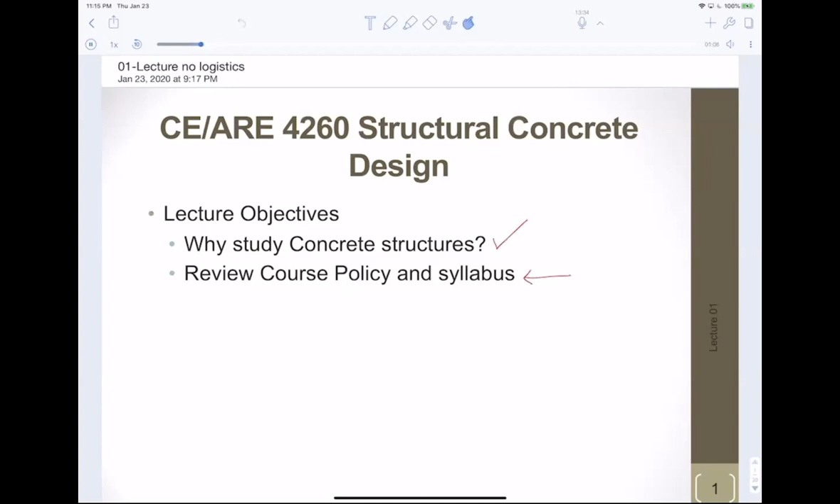On the first day of class, what I typically go over is introduce the subject of structural concrete, specifically reinforced concrete, and go over the syllabus. We'll do the syllabus later in a separate video. So right now, let's just talk about why you would want to study concrete structures, even if you're not going to be a structural engineer or majoring in structural engineering.

Concrete matters no matter what your specialty within civil engineering is. If you're interested in water resources, you have water control structures like dams and spillways. If you're interested in transportation, there are bridges or monorails like this one. If you're into geotechnical engineering, here we see an erosion control structure, often made out of concrete. And if you're into environmental engineering, there's the environmental aspect of concrete construction, since housing structures use foundations made out of concrete.

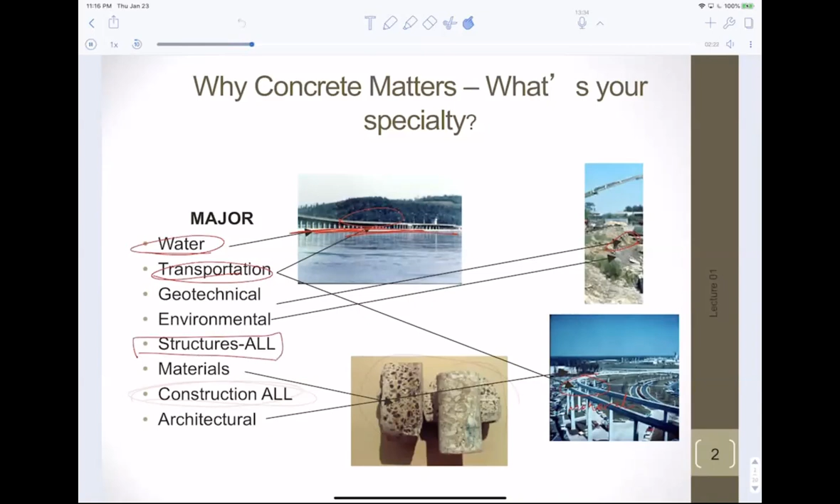And of course, if you're in structural engineering, concrete is involved in almost every building—even steel buildings have concrete foundations. If you're specializing in materials engineering, or if you took the 3210 class last semester or the one before, concrete is a widely used material in civil engineering. If you're in our new construction management program, concrete is a very, very important material in all construction projects.

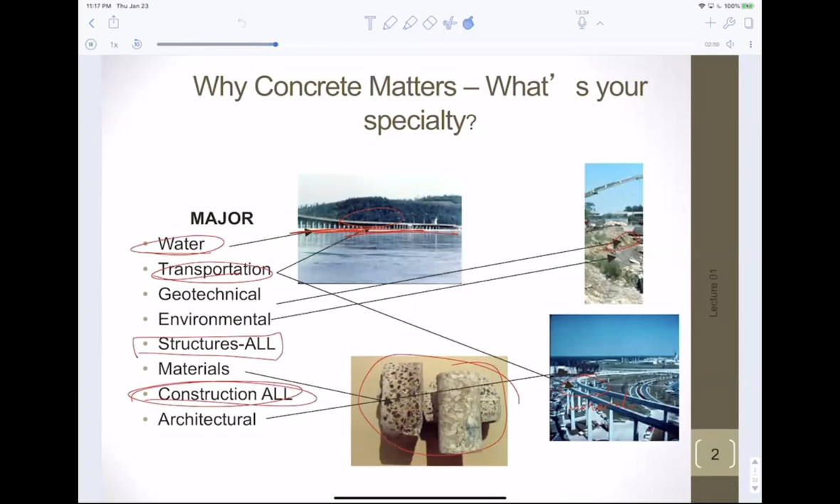And if you are in architectural engineering, of course there's a structural aspect of it, but in the design part, there are many unique structures, as we'll see later, that are made out of concrete. So these next few slides are for projects around the world made out of concrete.

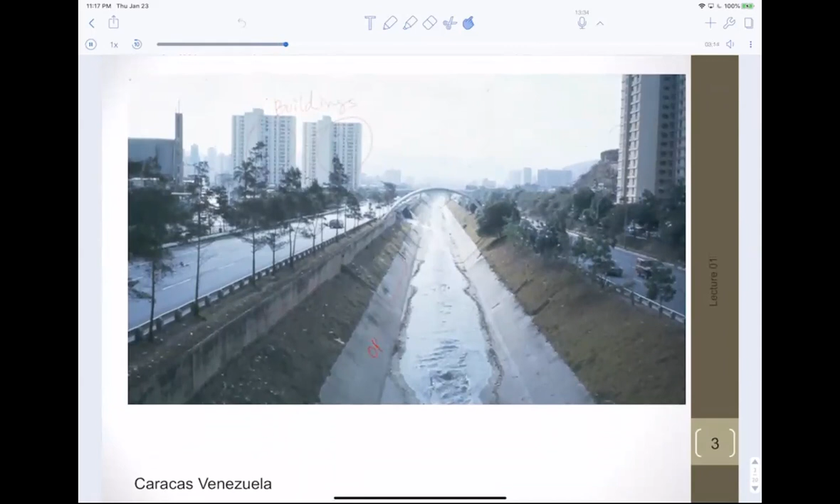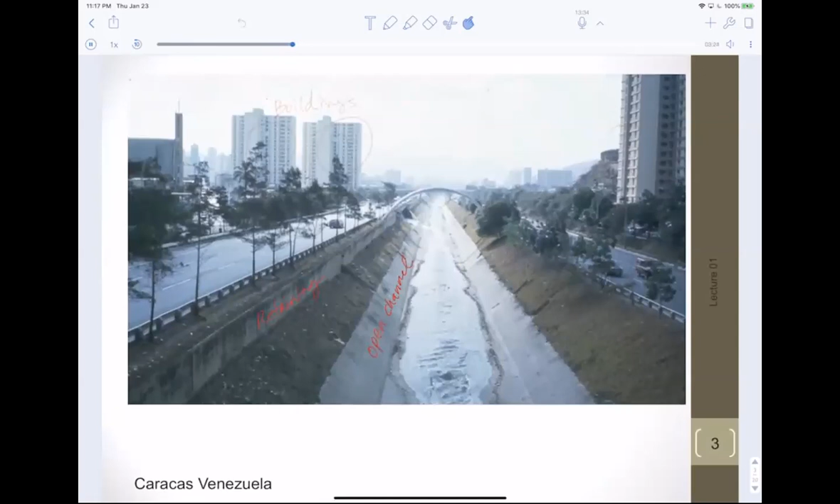Here's a picture from Caracas, Venezuela, and you see this open channel here made out of concrete. Here's a retaining wall, made out of reinforced concrete. And all over the skyline here, you see buildings, and often these buildings are made out of RC. I don't know if these particular buildings themselves are.

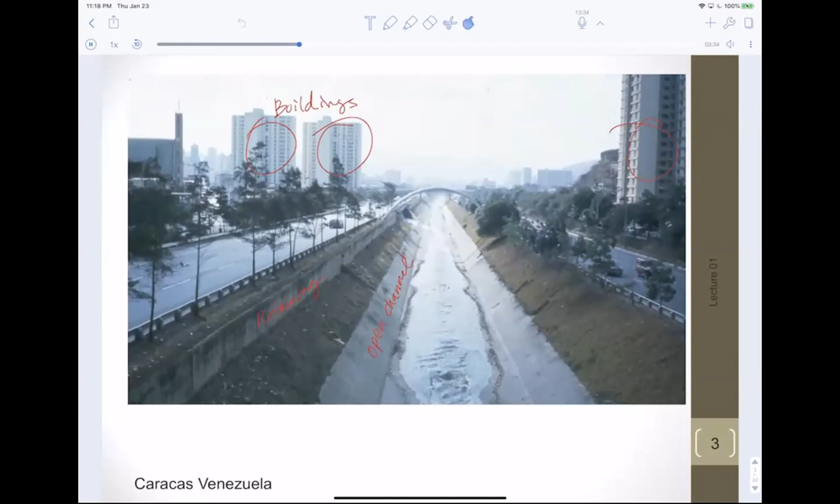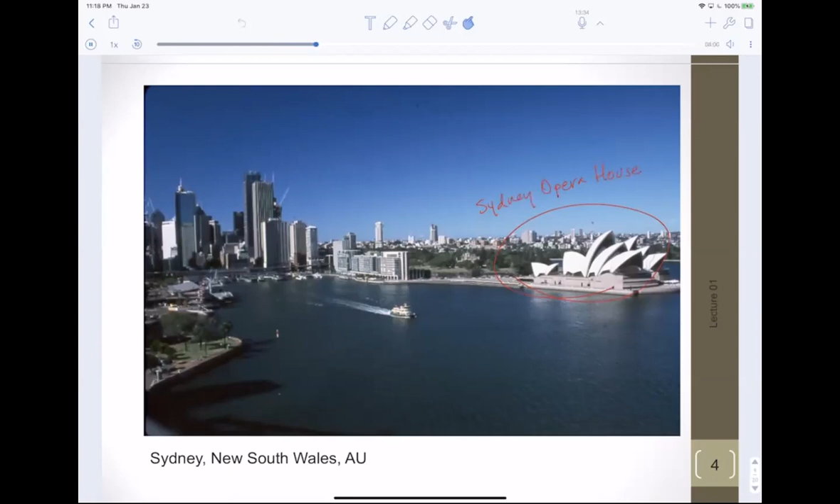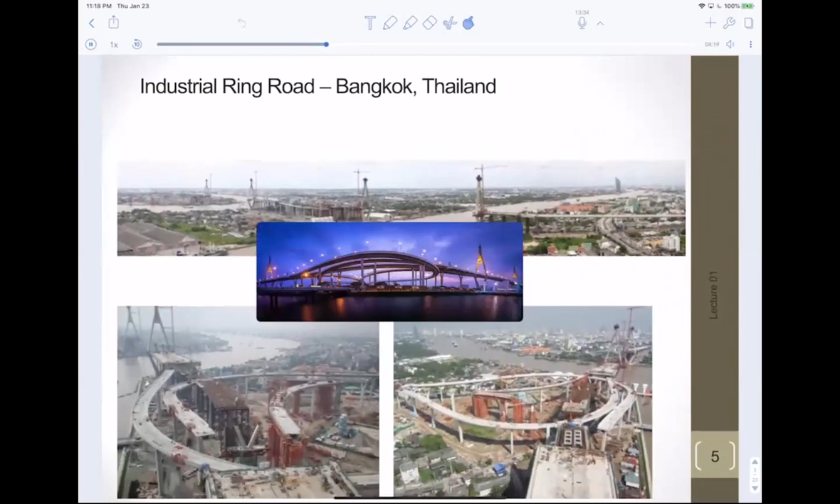Here are some pictures of the industrial ring road in Bangkok, Thailand, under construction. Let me paste in a finished picture—there we go, to give you an idea how amazing this road is. Again, made out of reinforced concrete.

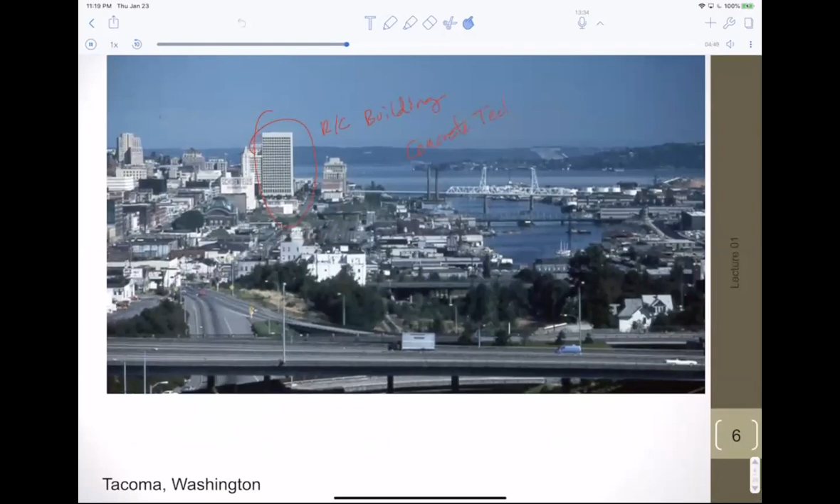This is Tacoma, Washington, just south of Seattle. There's a reinforced concrete building here—oh, there we go, there's an RC building. Tacoma is home of Concrete Tech, a precast plant, and they make some very innovative concrete products there.

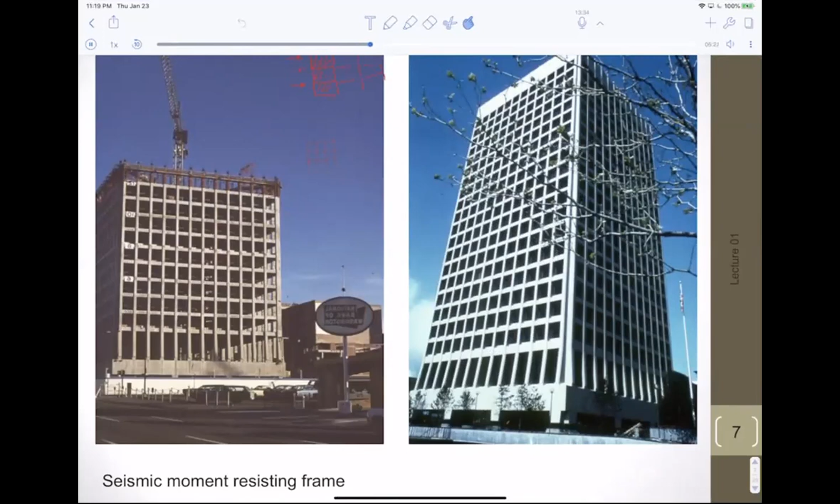These are seismic moment resisting frames. When you make a building, you can make it resistant to side sway in one of two ways. You can put in shear walls, filling these bays with walls, and that will stop it from moving over. Or you can make the building a frame, and you have to make all these connections at the joints very rigid so that it doesn't fall over in an earthquake. This is called a moment resisting frame.

This is of particular interest to me for a couple of reasons. One, whenever you read about people dying in an earthquake, almost always it's a reinforced concrete frame building collapse—they're really the people killers in earthquakes. I've done reconnaissance of the Christchurch earthquake, and a lot of the research I'm doing here at Tokyo Tech is centered around moment-resistant concrete structures, not necessarily moment frames, but all sorts of things, and I'll talk about those when I get back.

Another reason this is of interest to me: the first moment-resistant concrete frame built in the U.S. was actually designed by a University of Wyoming graduate. His name was Wayman Ching.

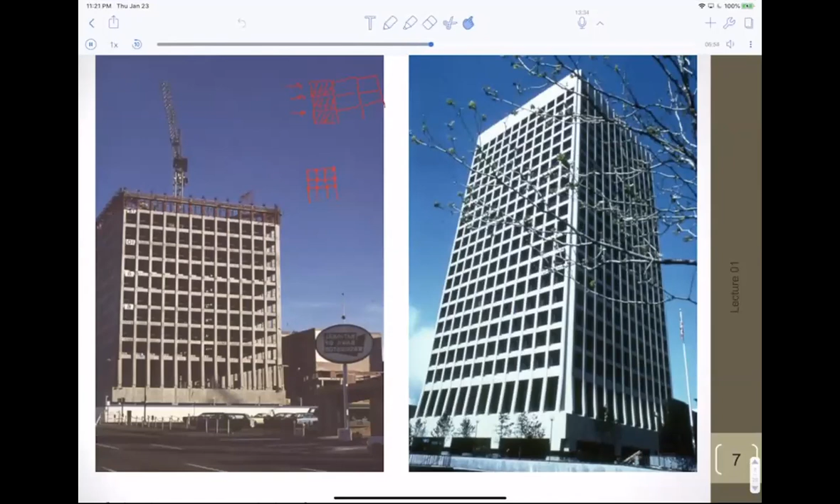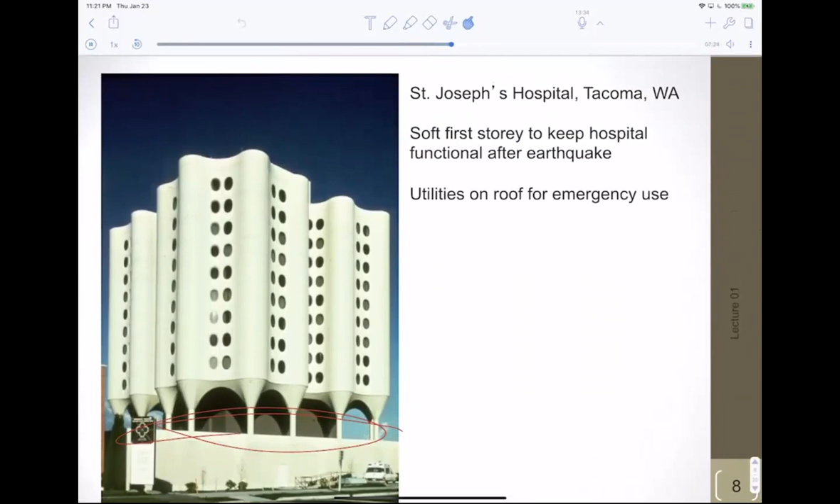This is exactly the sort of thing I'm looking at right now here in Tokyo.

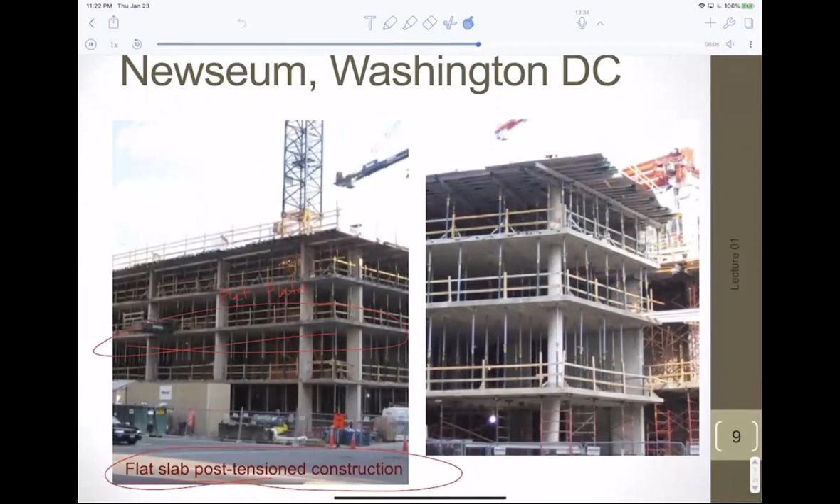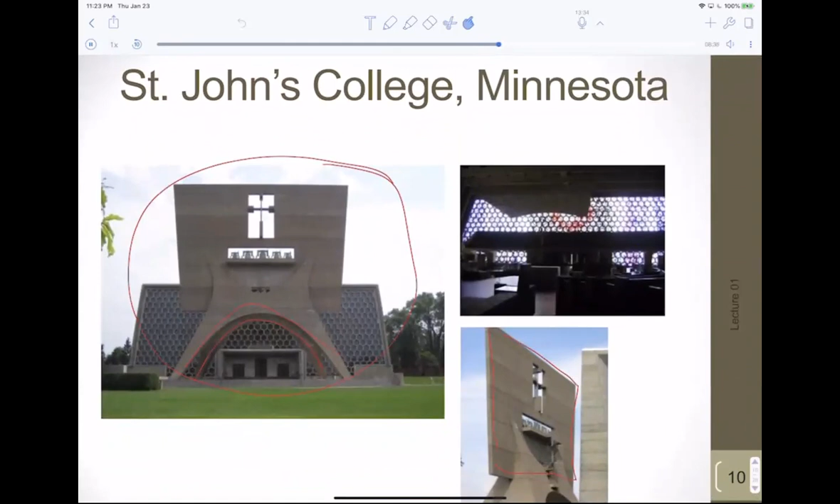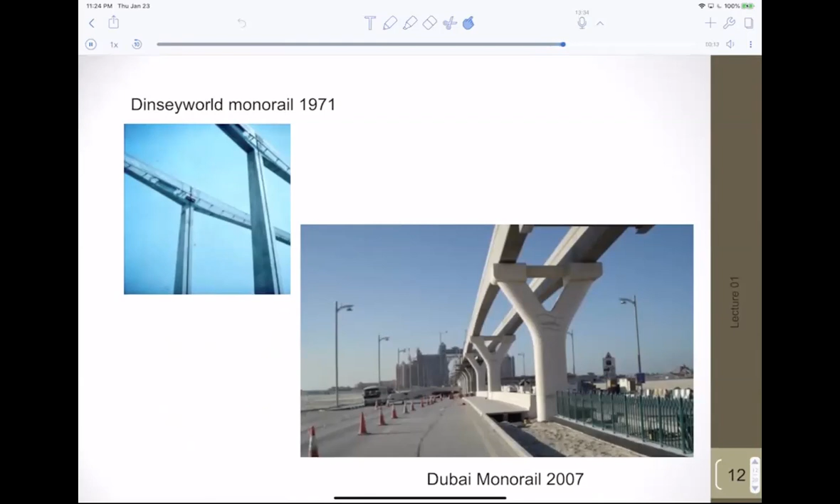One of the cool things about getting around in Tokyo are the trains. The trains are amazing. We can talk about that when I get back.

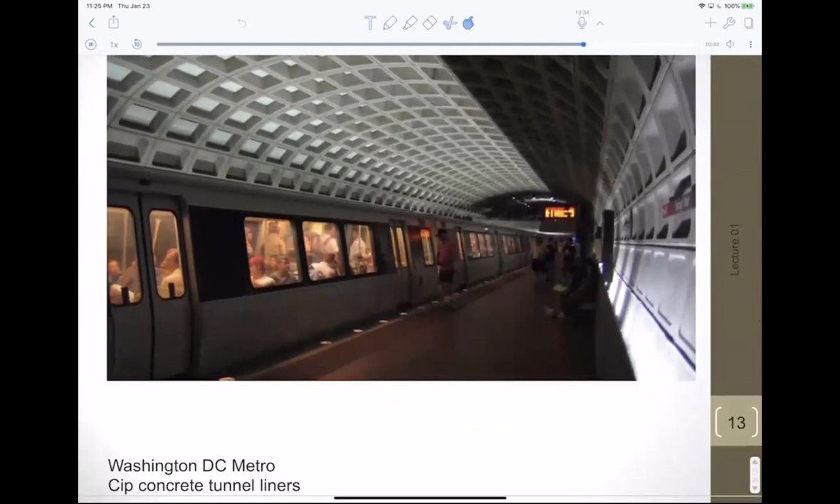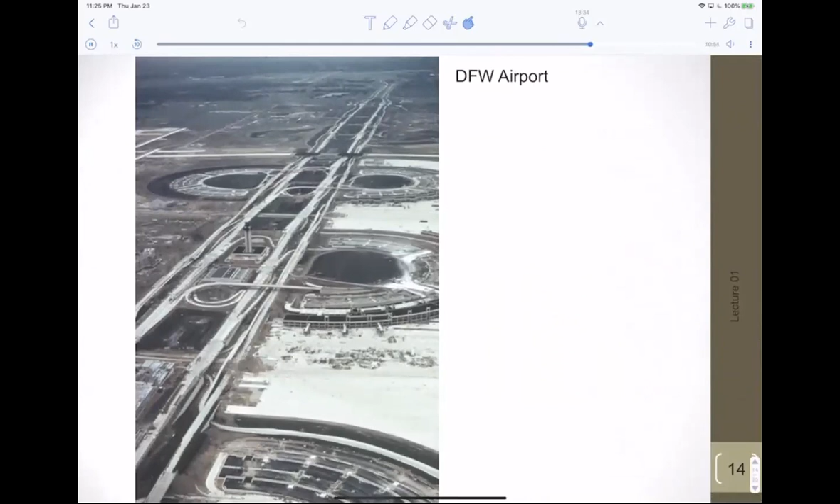Here's an aerial view of the Dallas-Fort Worth Airport, and you can see all these on-ramps and off-ramps, like these clover leaves. Those are all made out of reinforced concrete.

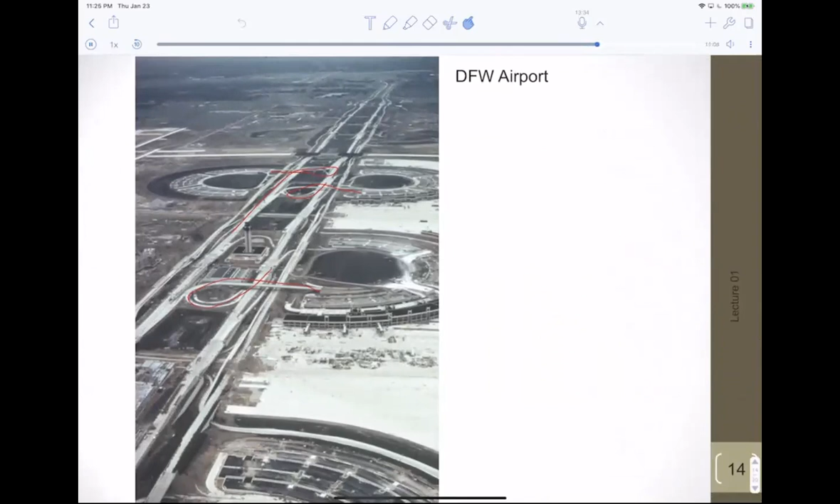This is an interesting structure - it's a pier that floats. You would put it next to the shore, and there's a bridge from the shore onto the pier that goes up and down with the tide. This bridge was probably cast at a plant, and they're transporting it to its final destination with a tugboat.

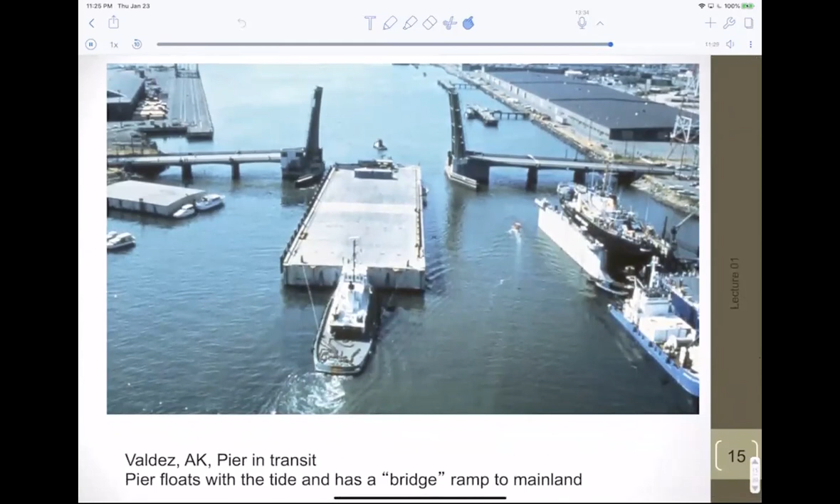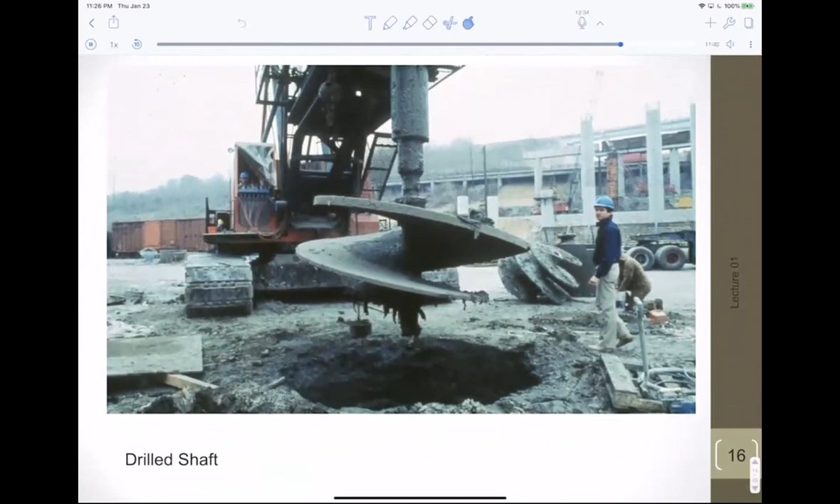Here's a drilled shaft foundation for the geotechs. You drill this giant hole, you put a rebar cage down in there, and you fill it up with concrete. These are prestressed concrete piles - they're made at a plant, and then you deliver them to the site and hammer them into the ground.

A couple of the papers I'm working on now have to do with seismic performance of concrete piles that have steel casing on them in earthquakes. Turns out these piles are shearing in large earthquakes - they just shear off.

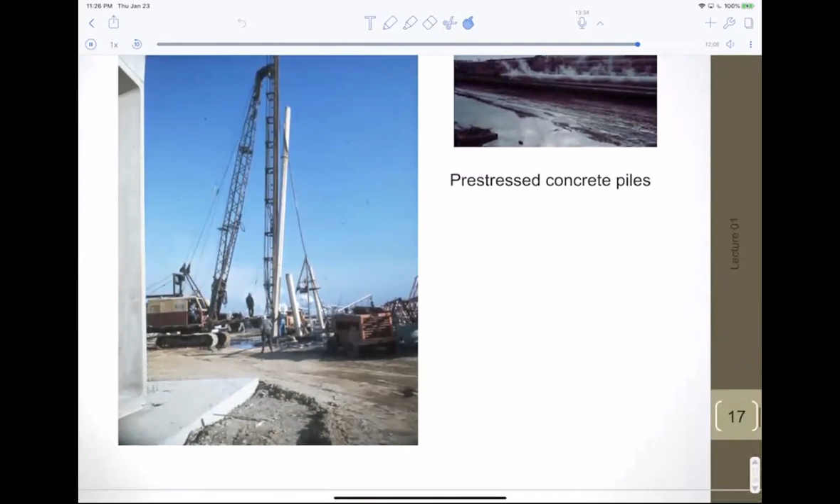In transportation, these type of bent structures that hold up overpasses and bridges are often made out of reinforced concrete. There's particular concern about the durability of these things, and the bad thing with reinforced concrete is if the steel rusts - the rust expands about 10 times the volume of the steel, and when it expands it can pop the concrete off.

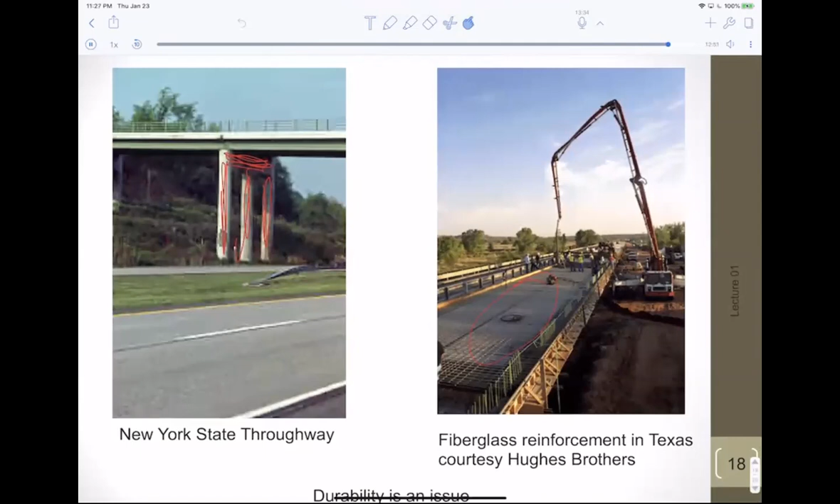So to avoid that, there's a project where they're using fiberglass reinforcement. Part of the problem with fiberglass reinforcement is that it's hard for concrete to grip it. We'll talk more about that when we get to development length.

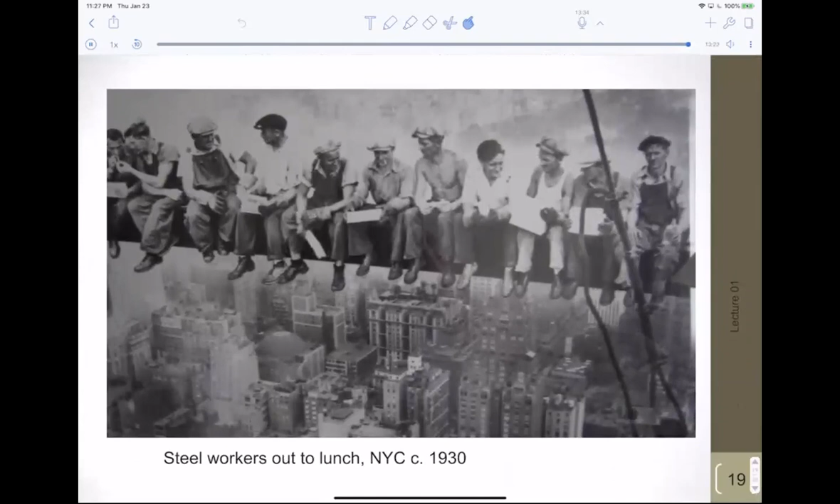I'm not like this, but often concrete people and steel people have good-natured fun at each other. I just think there are different materials for different applications. But here's a picture making fun of steel workers out to lunch - of course this is an iconic picture of steel workers having lunch, sitting on this beam high above New York City. So as you go through your schooling, I want you to think about where you're going and what you'll do, and maybe reinforced concrete will be part of your future.

Okay, so that was a brief introduction to the types of reinforced concrete structures. Next, I'll go over the syllabus, and then I'll have a lecture about what exactly is reinforced concrete.